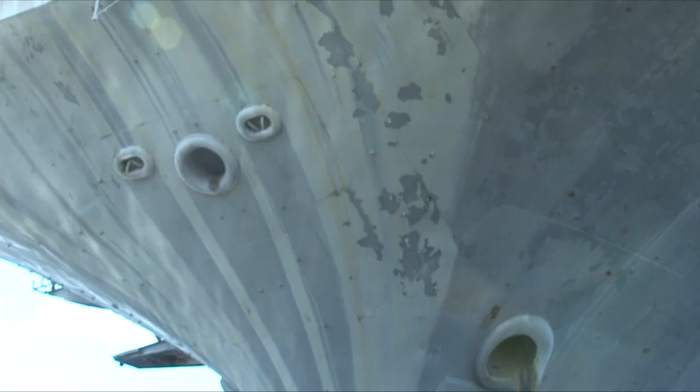A ghost fleet sits outside the Puget Sound Naval Shipyard. Aircraft carriers that supported missions for 50 years are gathering rust or are being used for parts. Now, USS Nimitz is going through some of the heaviest work that these ships had to go through to keep it going around the globe for the remainder of its life.

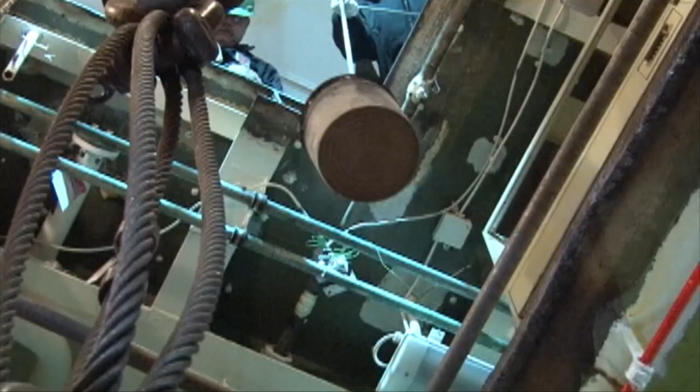Nimitz has been wrapped up while sailors and shipyard workers toil around the clock to get it looking seaworthy again. But looks alone won't get this 36-year-old ship running. Inside the back of the ship, contractors are applying dry ice to pull out the rudder pin so that the rudders can continue to turn smoothly.

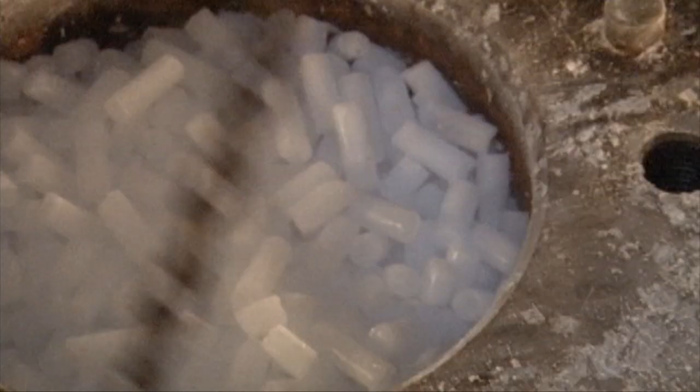The dry ice, we fill the rudder stock with it, which is the pin that holds the rudder onto the boat. It helps keep the metal from transferring heat when we heat the opposing pieces with ceramic heaters. The metal pin must be shrunk by getting it to a certain temperature, while the part that holds it in place is expanded with heat.

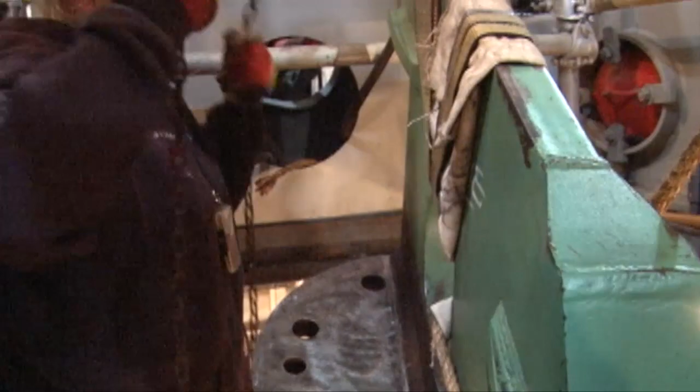When the pin is ready, it is hooked up to a crane. The ship is designed to have deck plates removed so that the crane can pull the rudder out from the flight deck.

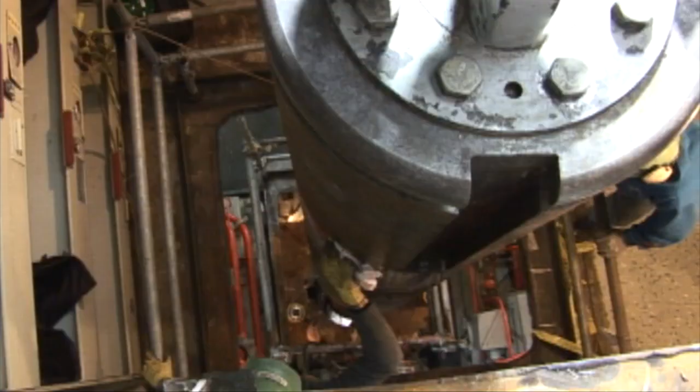We have to shrink the metal. We pull the rudder post up through all the decks, and it comes out the flight deck with the crane, and we're able to back the rudder out.

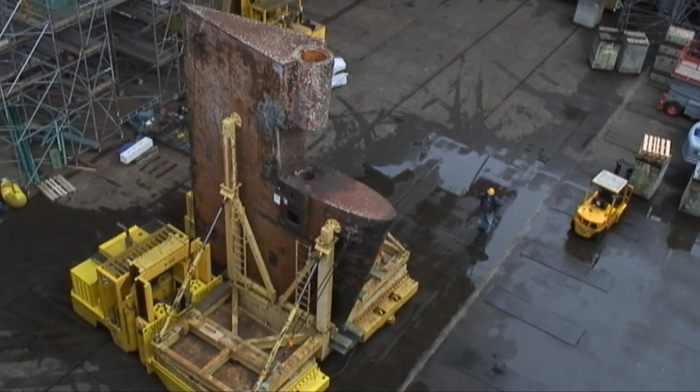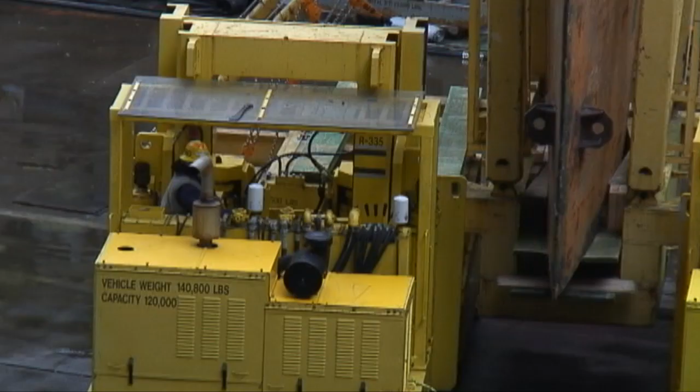After we break the interference fit, we hook up our L-pars to the outside of the rudder, a big clamp fixture, and we're able to back the rudder out. So at the end, you have the rudder stocks hanging in the crane, and the rudder blade is sitting in the L-pars.

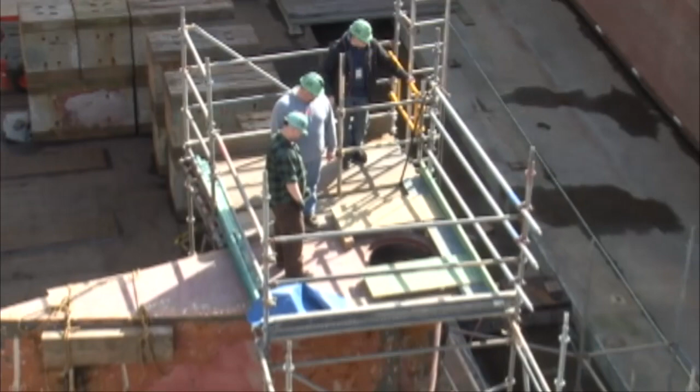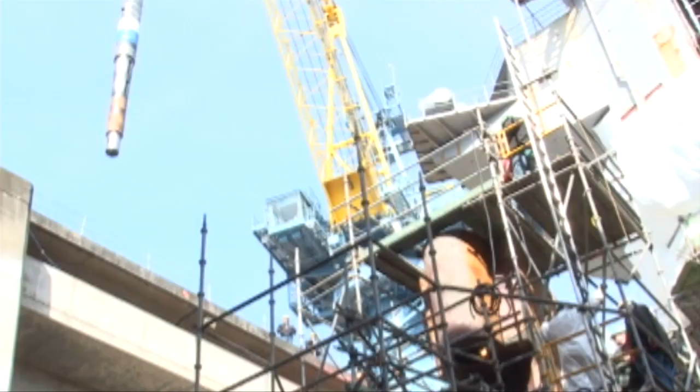Once the rudder is removed, the pin is brought back in with the crane. Scaffolding is then built around the rudder in the dry dock. The pin is lowered so the contractors can see if it still fits inside the rudder.

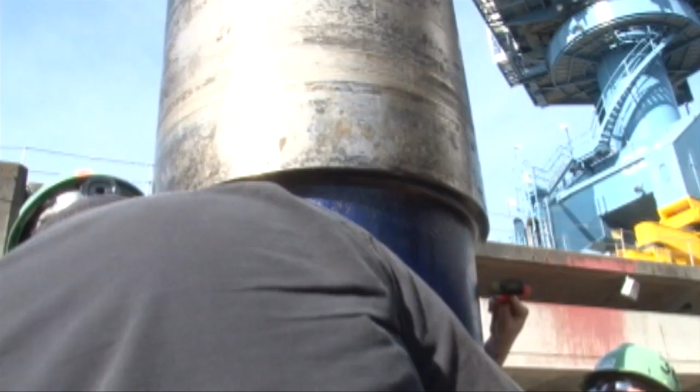We have to check the contact between the rudder stock and the rudder blade itself. So we clean everything really good, and we'll use a transfer dye from one piece to the other, and we'll drop the stock down inside using the crane, and it'll make contact in the rudder blade in the bore. We'll pull it out and we'll read the transfer, and we have to have a certain percentage of contact between

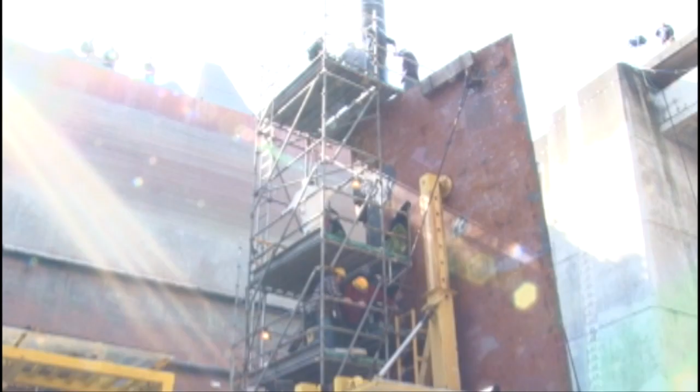the two components. We can machine it and cut a lot of the corrosion out, and then go through that process again, and we'll get a better contact. The extreme cases, we have to weld build up that area and then machine it. Over time, this rudder pin has shrunk and been warped.

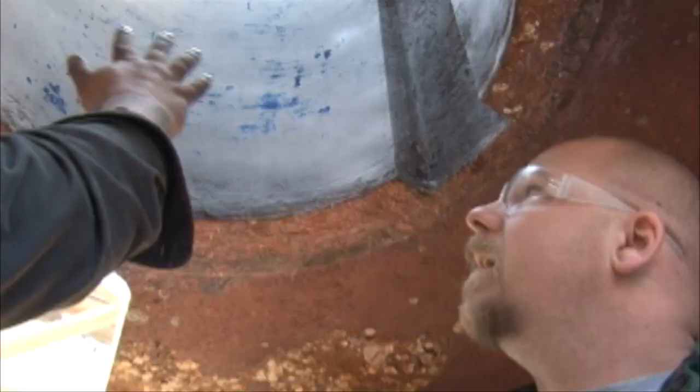See all the blue spots? That's where it's touching. Everything else is not. Okay. What we want to see is about 90% contact. So this, in theory, should be all blue, where we laid all the blue.

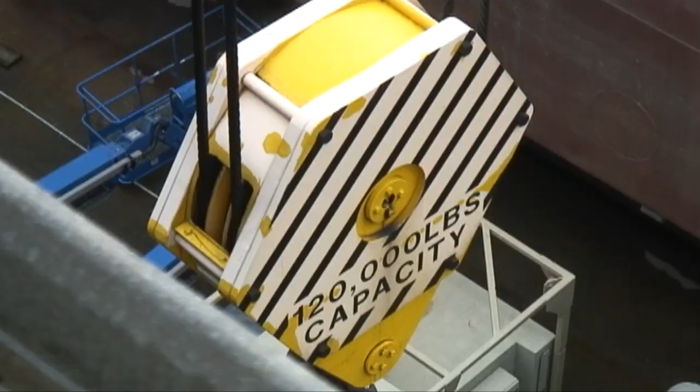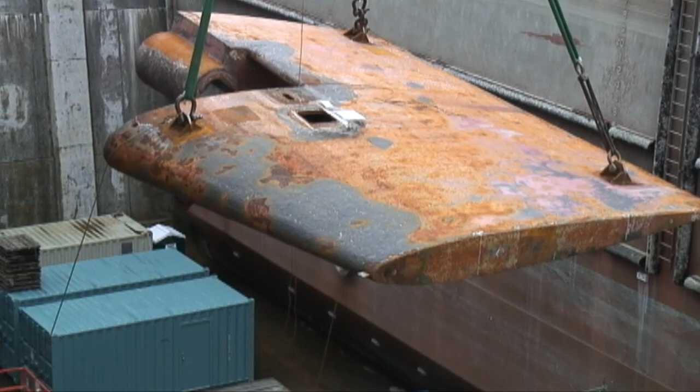After the pin is tested, the rudder is laid on its side and lifted out by crane to a warehouse where it will be renewed over the next few months. The rudder blade's taken out. There's cracking in it. We have to inspect the whole blade itself. The surfaces where it comes in contact need to be cleaned and inspected. We have to make sure they're not cracked and pitted too bad, too much corrosion or repair.

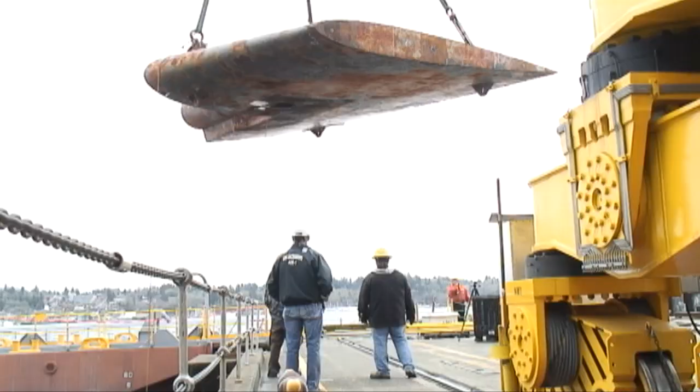There's a lot of preservation that goes into it before it comes back out here. It gets completely sandblasted and repainted before it comes back. That process can take 4 to 5 months.

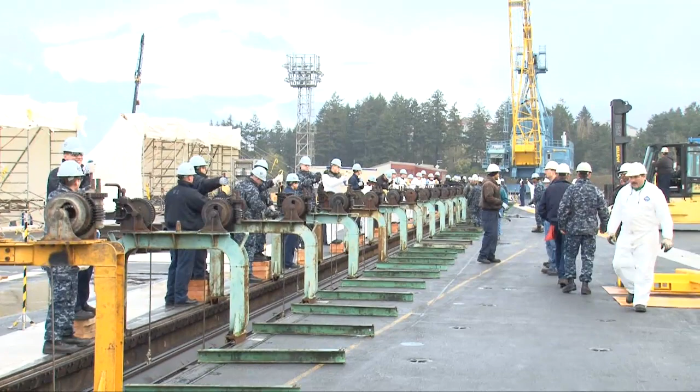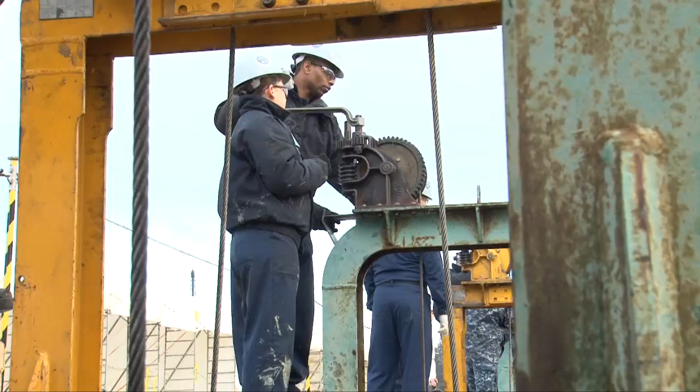While contractors and shipyard workers fix the rudders, sailors are working on pulling the catapults out of the flight deck so jets can be launched when they head back out to sea. On cue, 2-person teams crank the catapult out by hand. This process repeats for the next few hours as they slowly make progress.

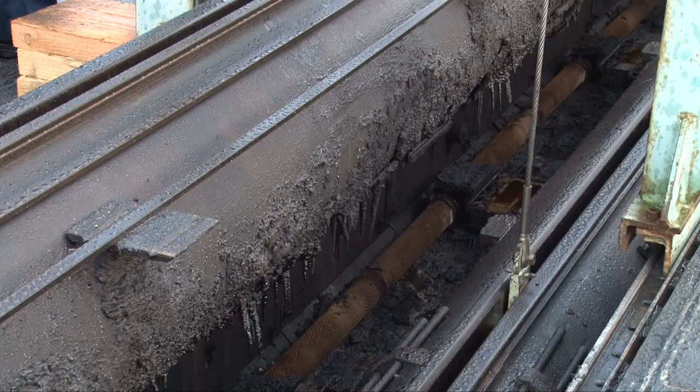Well, today we lifted Cat 3's cylinders, and we do this because over the course of time and launching a lot of aircraft, the gap in the cylinder starts to separate. So we do this to raise up the cylinders, pull them together, and it closes the gap so we can put them back to operational status.

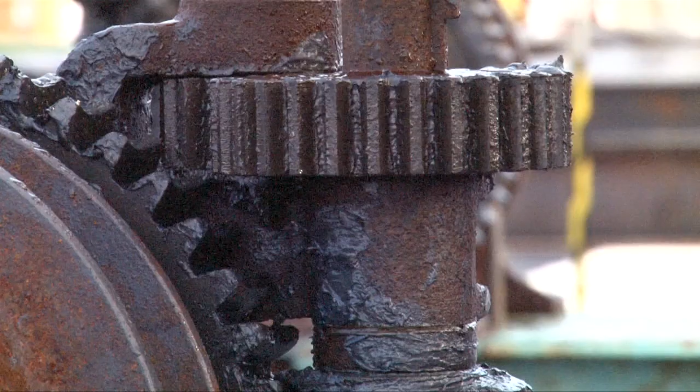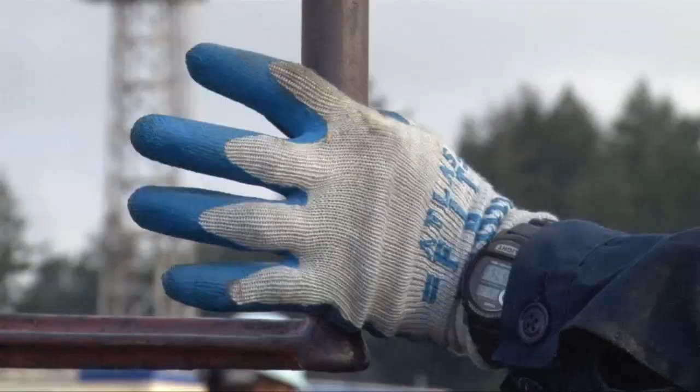Pull one cylinder up at a time. It takes about 65 to 70 sailors and about 6 VRT technicians to complete this whole evolution. The catapult has accumulated a buildup of grime over time, making the catapult heavier.

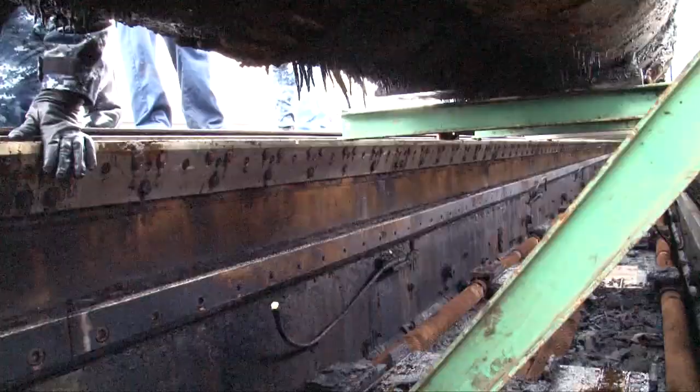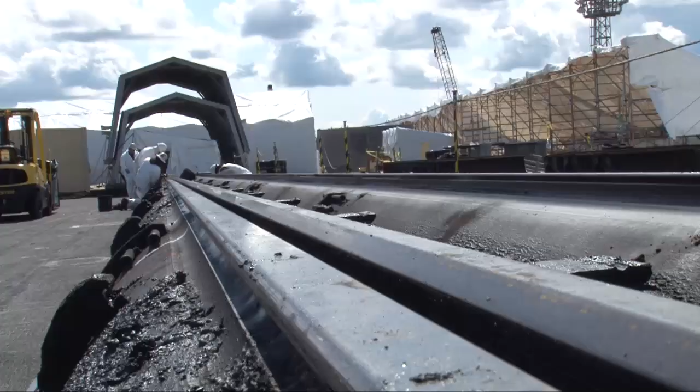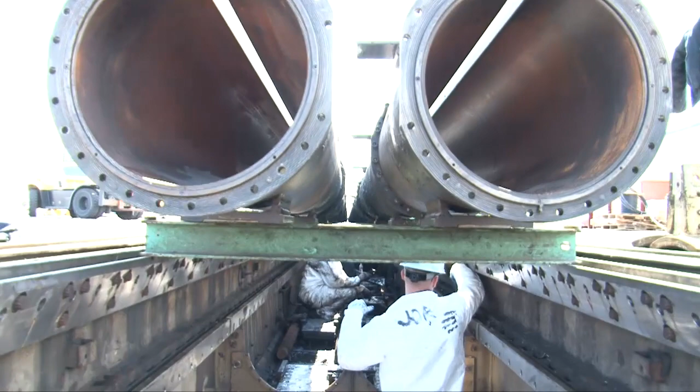Once both sides are lifted, metal beams are put underneath to hold them up, while another team goes underneath to scrub the muck out. Right now we're getting rid of all the FOD and all the old grease and all the built-up stuff that's been down here ever since the last time we pulled up this catapult.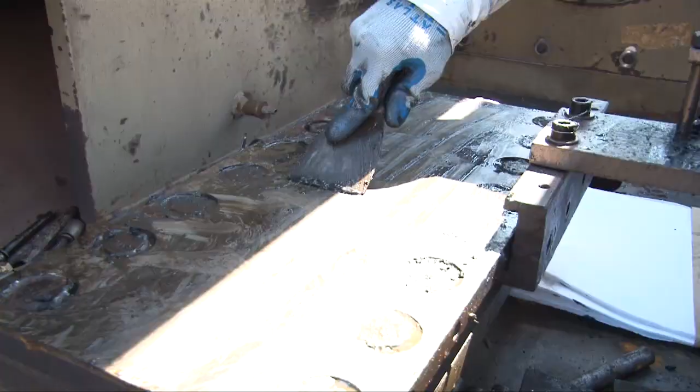Right now, what we're doing, I'm cleaning off all of our foot pads. I make sure all the grease lines work and all these other things. So make sure that the grease can get to the foot pad where it's supposed to be.

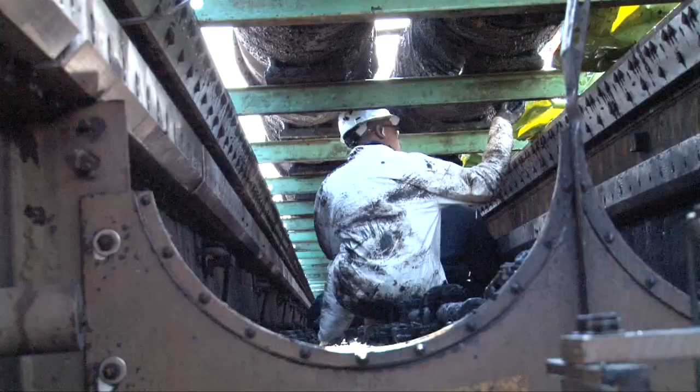When I checked on board my first ship, that was my first job, to get in there and clean the cat. And I must have ruined about all my coveralls. I ruined them. I remember that. It's a very dirty job. So now we have these white little suits that we use, and it saves the uniform because uniforms add up. You know, it gets expensive. So we have these white suits that the sailors use, and it saves money in uniforms.

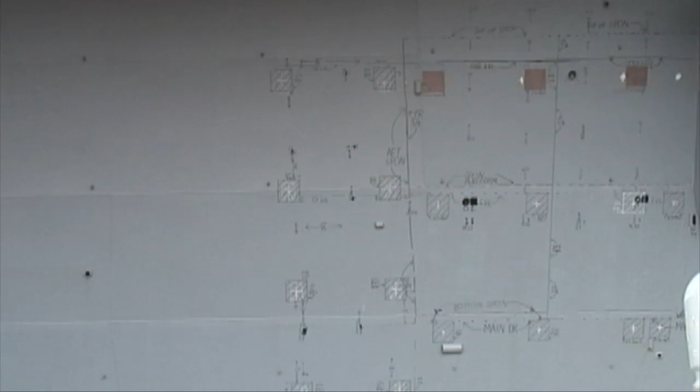On the side of the ship, preparations are being made to add a whole new platform. The new platform, called a sponson, will allow security teams to place a gun mount on another area of the ship to protect it while entering dangerous areas. Markings on the hull show where an upgraded sponson will soon be attached.

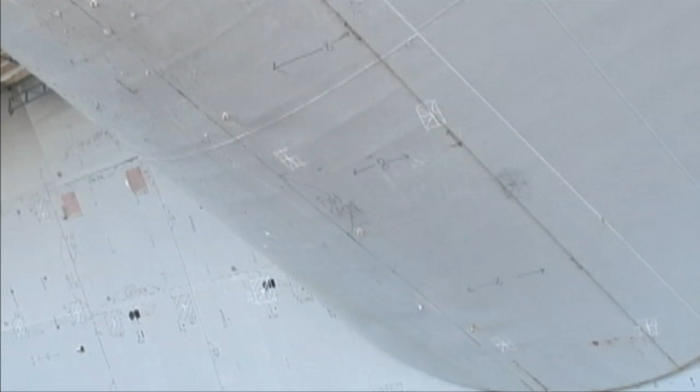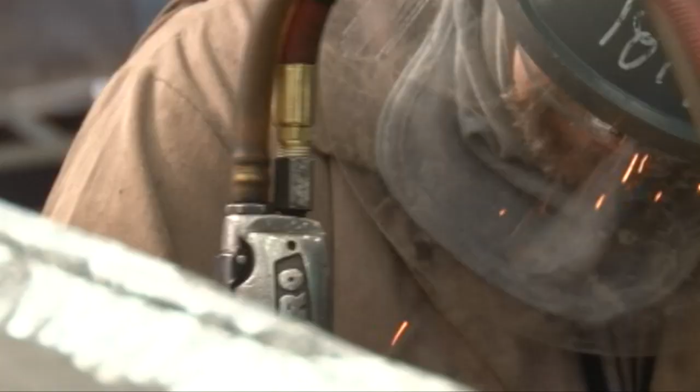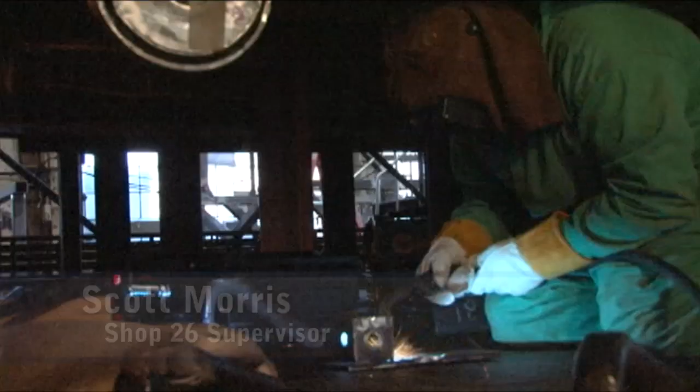The sponson is built in a warehouse on the other side of the controlled industrial area. This is for a gun mount platform. I want to say this one here particularly took about 2 months. It's going to take about 3 months total. We have the skill and ability here to make pretty much whatever our customer wants. We've had quite a few change of hands working on this project, but everybody gets familiar with it really quick.

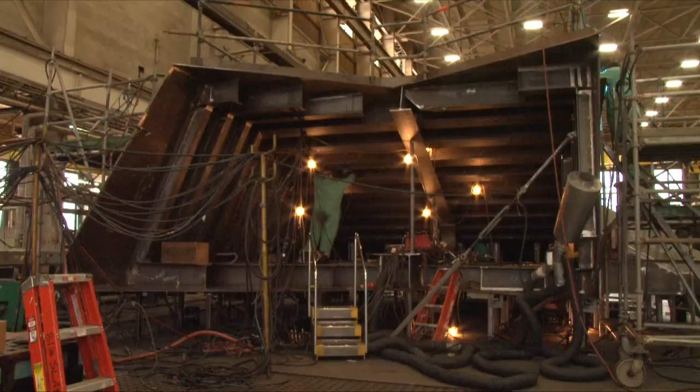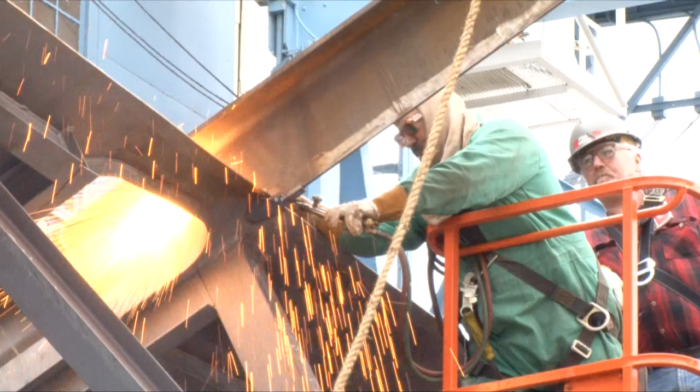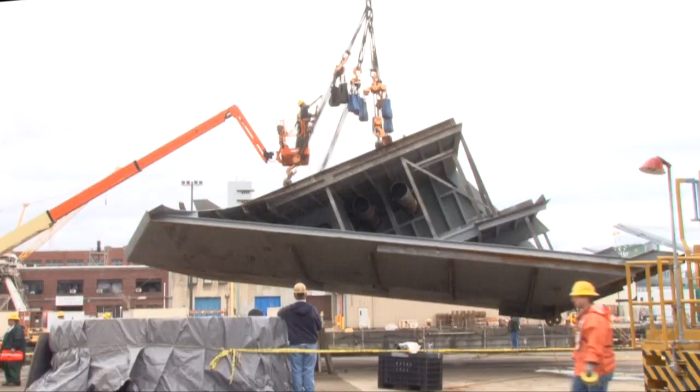Right now we're at the final stages. This has been approximately 2 months now in the making. After most of the building and welding is completed inside, the sponson is brought outside and the final touches are done while the workers wait for a truck to bring it down the road. Some ways down the road, a crane will lift the sponson off of the truck, bringing it the rest of the way to the ship where it can be welded in place.

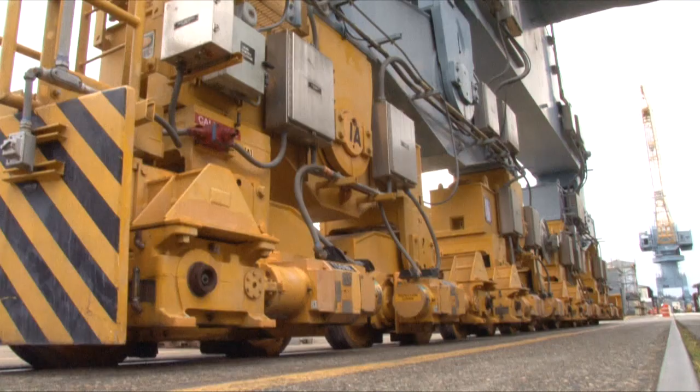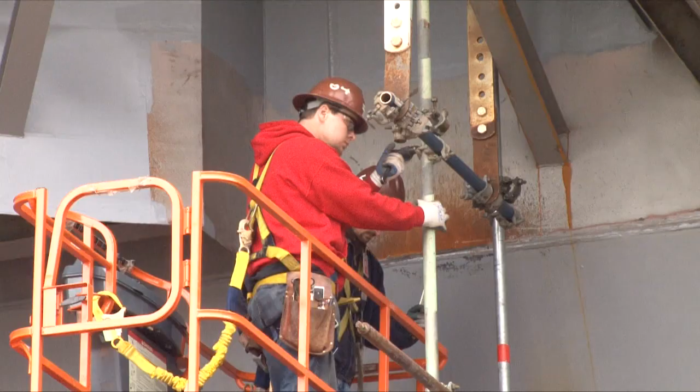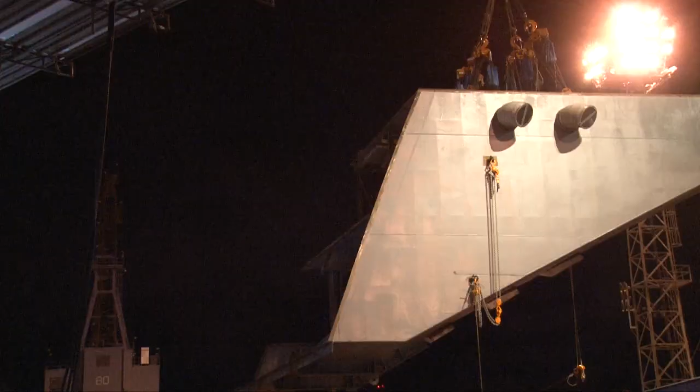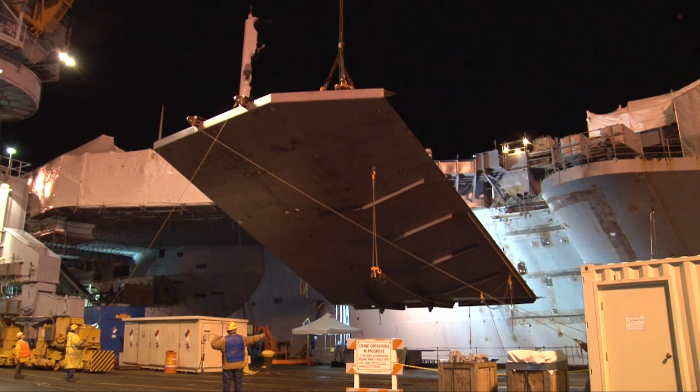For the most part, they're going to be from a JLG, so they're going to be suspended over the dry dock in a basket and weld around the whole thing until it gets secured. All the preparations are in place, but the shipyard workers have a long night ahead of them. That night, the sponson is moved into position. Riggers will move it carefully. The platform must be aligned perfectly.

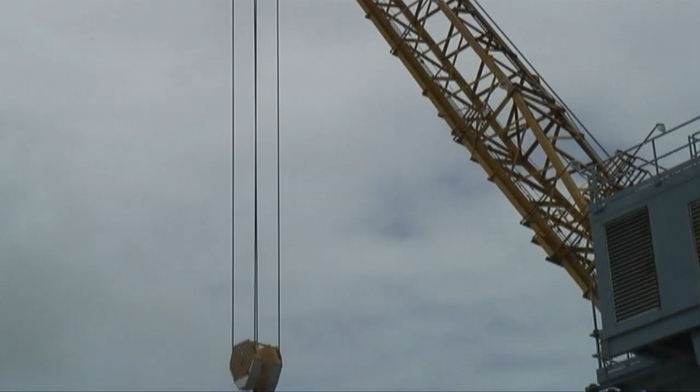The next morning, the day shift workers will continue work on the sponson. Now begins the long process of welding it into place. They're going to hook it up to the crane for about 5 days and weld around the clock until it gets secured enough to release it from the crane.

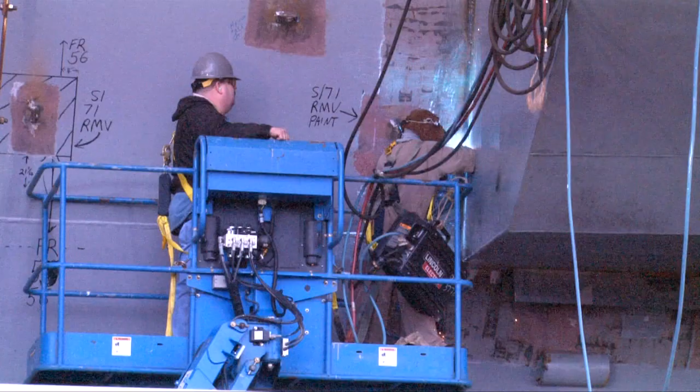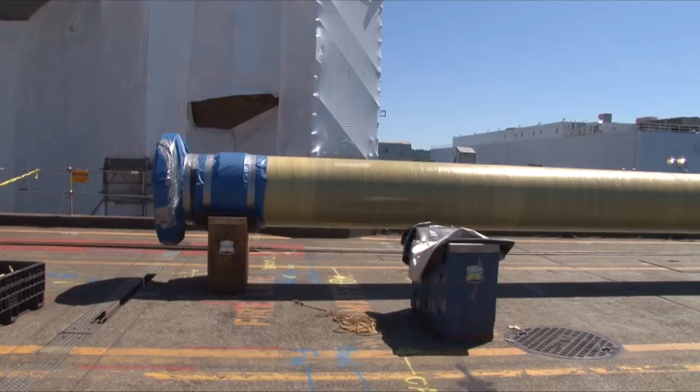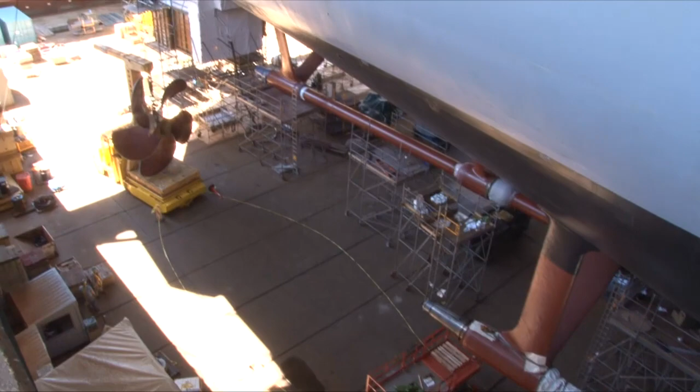Summer has finally rolled around, and more progress has been made around the ship. The rudders are back, and they're not the only thing that's been fixed. The propellers and propeller shafts, one of the first things to be removed, are finally being reinstalled. Also waiting at the end of the pier, the anchors float on a platform waiting to be put into their proper place. But first, the chains must be linked together.

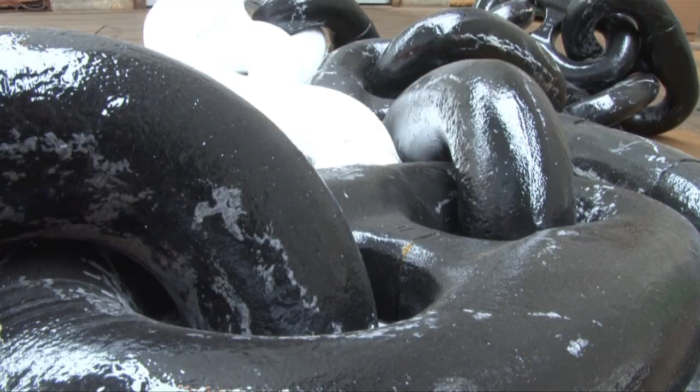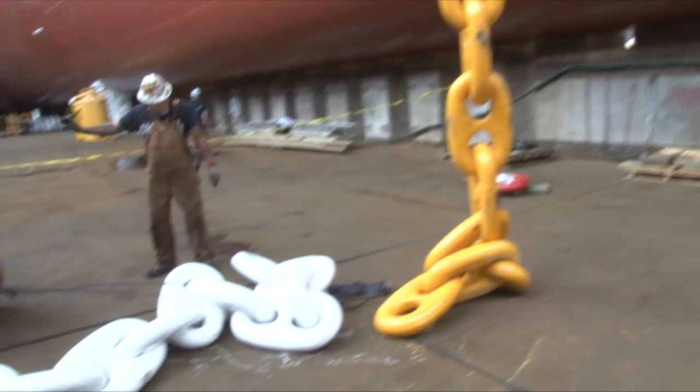I've been doing it for about 10 years. I did the Carl Vinson, the Lincoln, now the Nimitz, so it's getting pretty easy now. Hours, days, weeks. If you got good manpower, if it's just me and him, it feels like 4 or 5 people. It'll take a good week for one chain. In one day, we can put up 3 to 4 shots. It may seem like an easy task, but the links are heavy. It's 350 pounds of link. And you can see I don't work out all day, so I got to use the forklift to help me lift it.

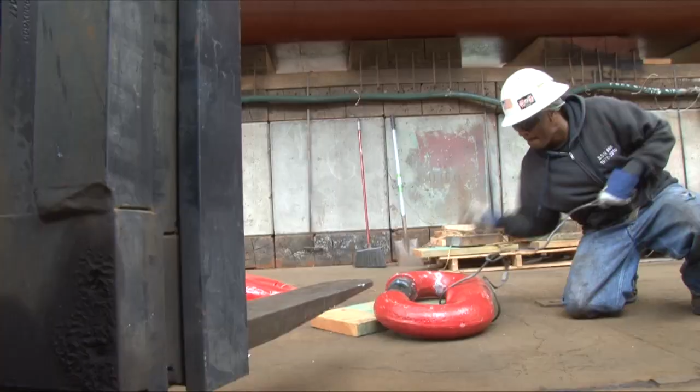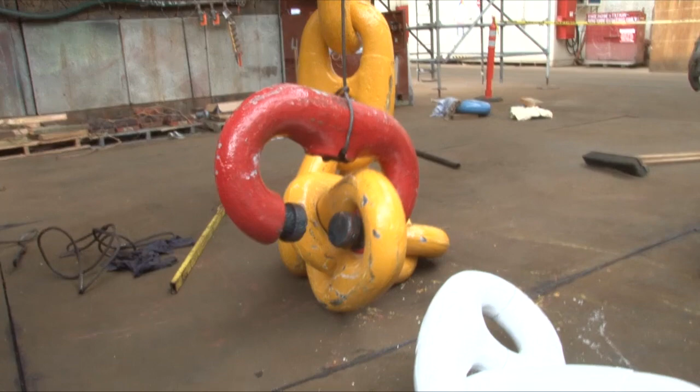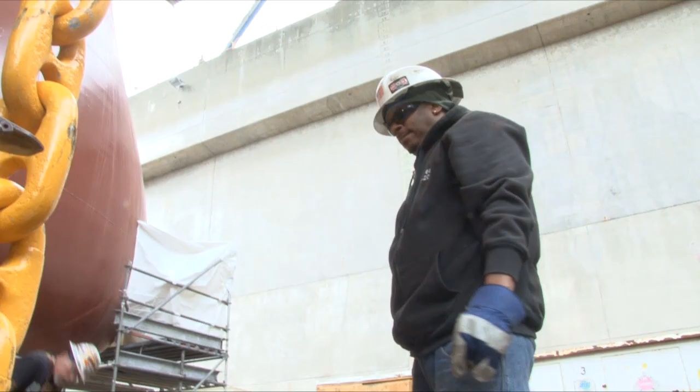Moving chains with the forklift is the easy part. Connecting them is not. A red link will connect the 2 chains. The first side slides into place. Turning the red link to connect the other side will be much harder. Like Tetris, like you're playing Tetris around here. It's like putting puzzle pieces together, you know what I'm saying? In other words, it's a lot of guesswork to get the pieces to fit, and all this moving is stripping the new paint job.

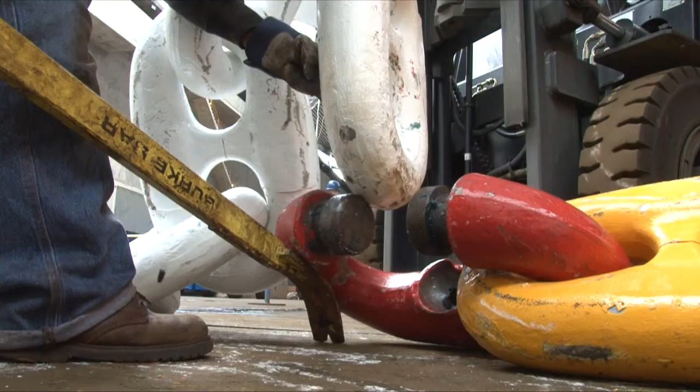You got to work with it. You got to play with the chain until you get it correctly done. You know what I'm saying? Believe me, it ain't no easy fit. You got to work with it. You got to just put it up left, right, up, down, upside down, and try every trick in the book. Really, that's what I do. Trying every trick in the book. There can be a lot of tricks to learn, though, and it takes a long time to learn them all.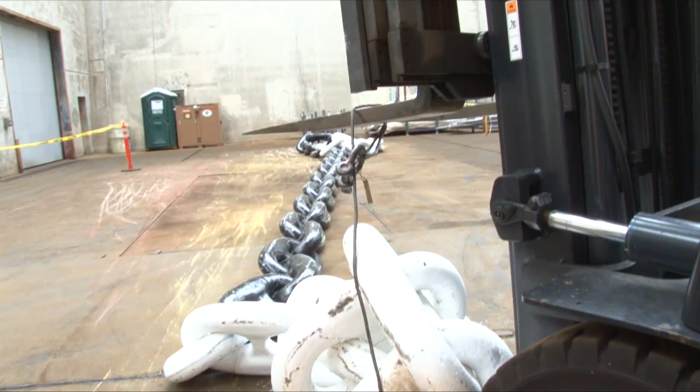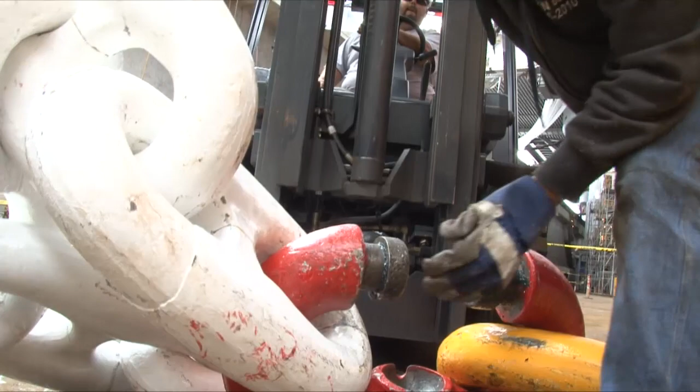A week and a half for one raw chain, a good week and a half. If we get more manpower, we should be able to do it. But between me and this old guy right here, we're trying our best. Their best is enough to get the job done. With a little more working, the link finally cooperates and fits into place. You can't do it by yourself. You can't. It's hard work, really.

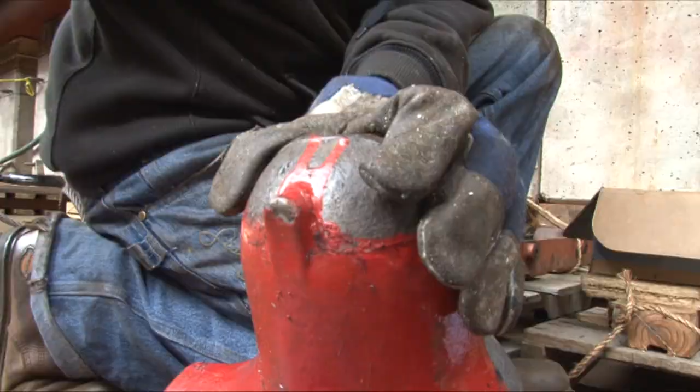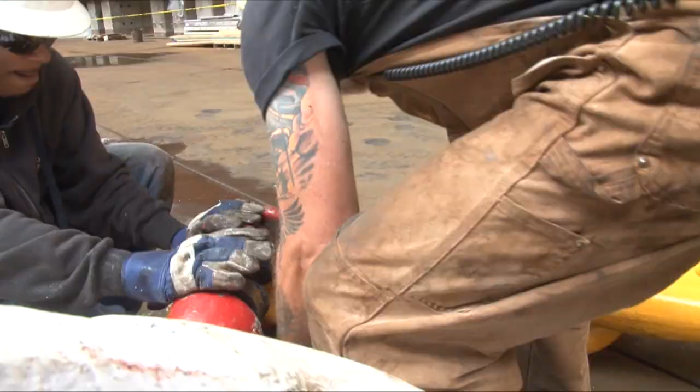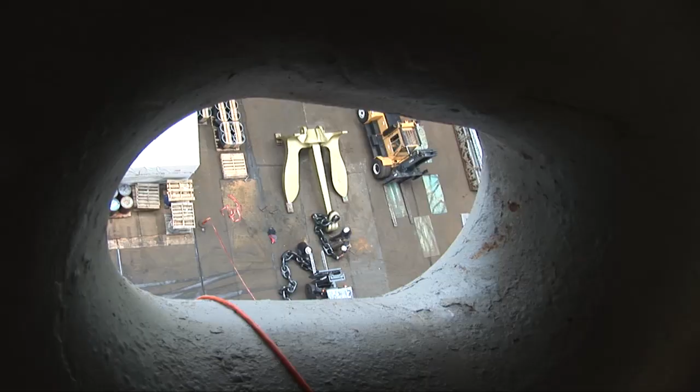Now for the final piece. This time, success comes quickly. Got it. A lead rod will hold the final piece in position, and a victory dance follows. In the forecastle, sailors raise the completed chain into the ship as the anchors sit in the dry dock. The anchor can't be moved so easily, though, and must be placed on rolling planks.

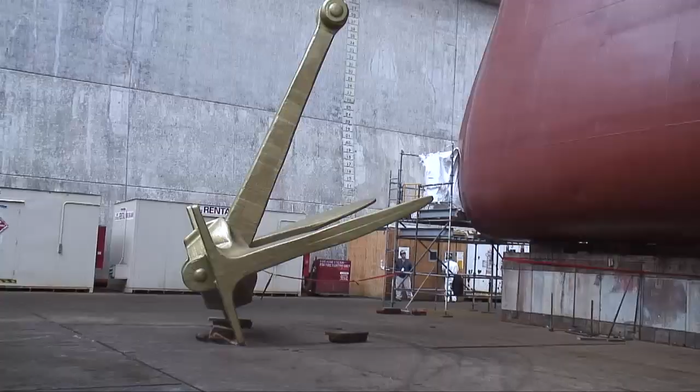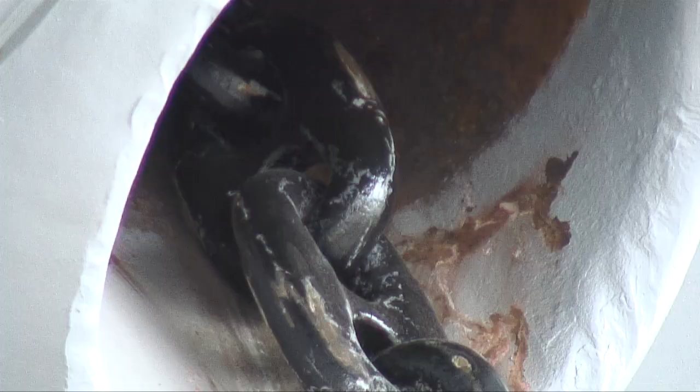The anchor must be brought up slowly to avoid damaging the hull. The massive anchor swings back and forth. Communication between the dry dock and forecastle is crucial to get the anchor in place while avoiding damage to the ship. Everyone is watching as the anchor is reunited with its place along the hull.

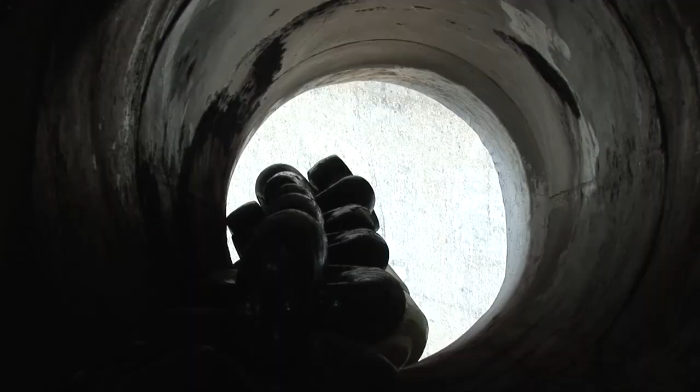As summer's end draws near, the ship is finally coming together. The Nimitz's time in dry dock is coming to a close.